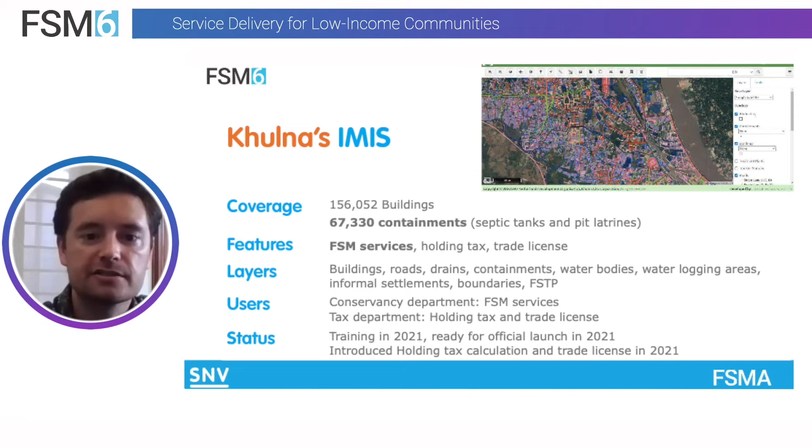In Khulna, we have also the census of 150,000 buildings, and the 67,000 containments that the city corporation will use for FSM services, holding tax, and they are also planning for trade license.

In Gazipur, which is also a very big city, we selected 2 of the high-density zones, and we collected census-based information of the 130,000 buildings with all the information about the containments, the connection to the water supply, and others. The city will use the IMIS for FSM services, sewerage, holding, and also water supply. And in other smaller cities, we collected information of 1 ward now, and it will also be used for FSM service and holding.

Of course, there are a few challenges associated with the implementation of the IMIS. The data the municipalities have are not comprehensive enough and not updated, and it is very difficult to get access to this data.

Holding ID is the key to the IMIS system, and there is no nomenclature in Bangladesh for holding ID. And we know that adapting changes is always a challenge in any organization. And finally, hosting data requires a significant fee to be borne by the municipalities, and we are negotiating with the central government to reduce or waive the fee.

The potentials of IMIS are endless. For example, cities having multiple authorities providing the services can share their data through the IMIS for better coordination. The online payment system can be used for paying the taxes and the service fees. And the IMIS can also be linked to national databases. For example, the health information system, if linked to the IMIS, can monitor COVID-19 cases in a particular municipality with their geographical distribution.

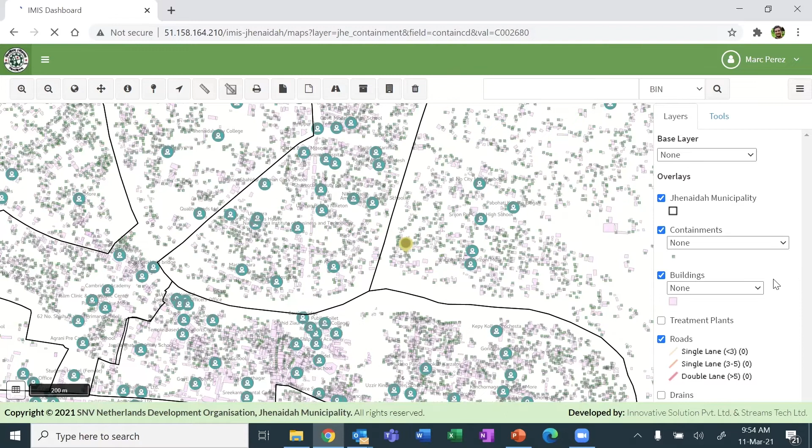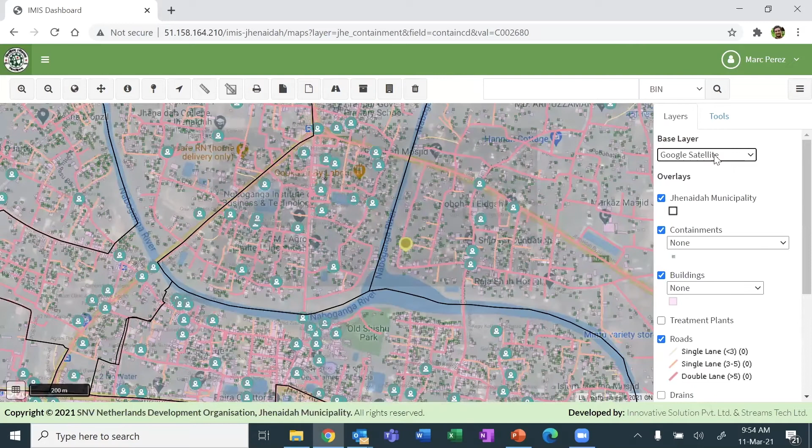We can see the latest applications in Jhenaidah. Here with the lists, we have all the applications, and we are going to select this application here. We have different actions. We can go directly to the map to see exactly where this containment, which was emptied last month, is located. We see some layers on the right side. We can enable or disable any of those layers. We can add in the background Google Street, OpenStreetMap, or Google satellite information. We can also enable water bodies or disable landmarks.

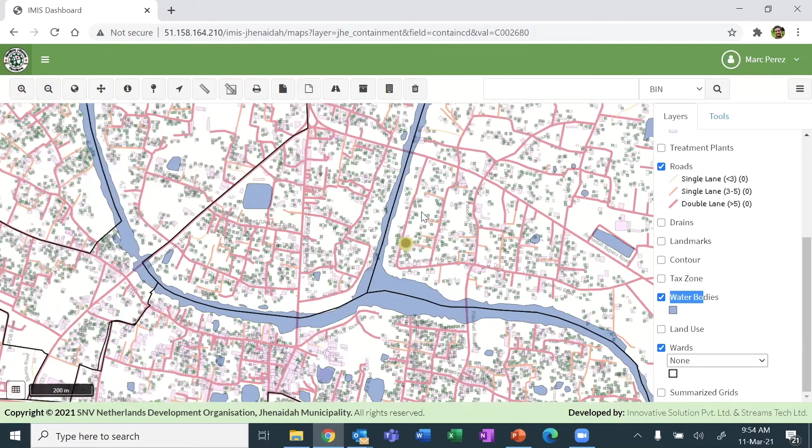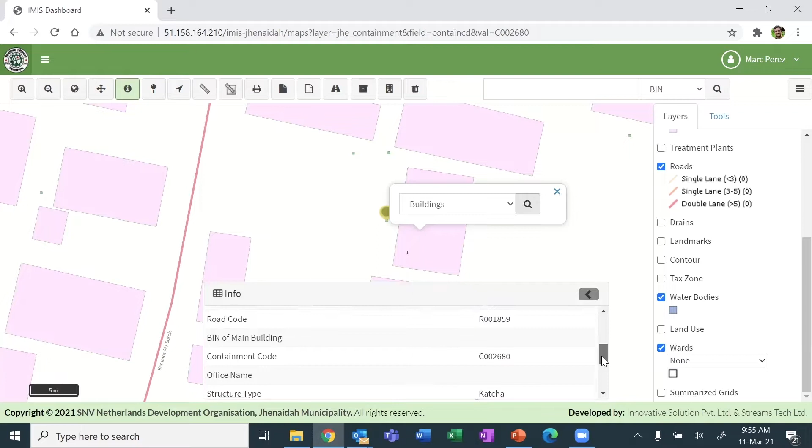Then we can zoom into the containment that we selected and see its information. This is a pit latrine in ward number 1. The size is 3 cubic meters, and it serves the people in this household. It's connected to that road. We also see when the next emptying date for that containment should be. We can also see information about its building, the tax code, the number of floors, the area, or other information about the structure type or its function.

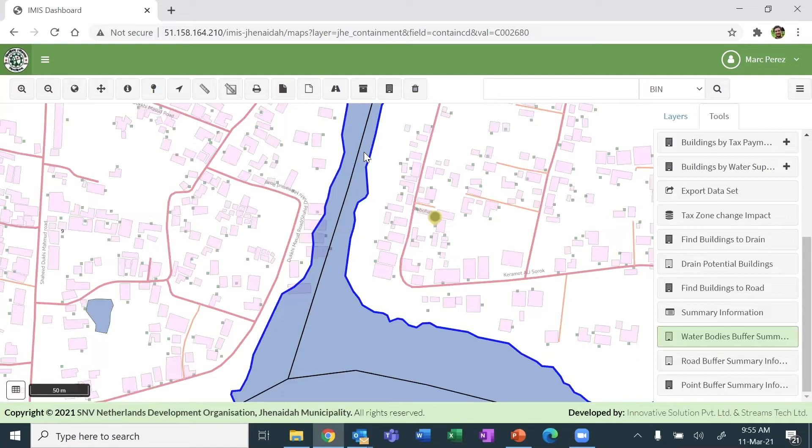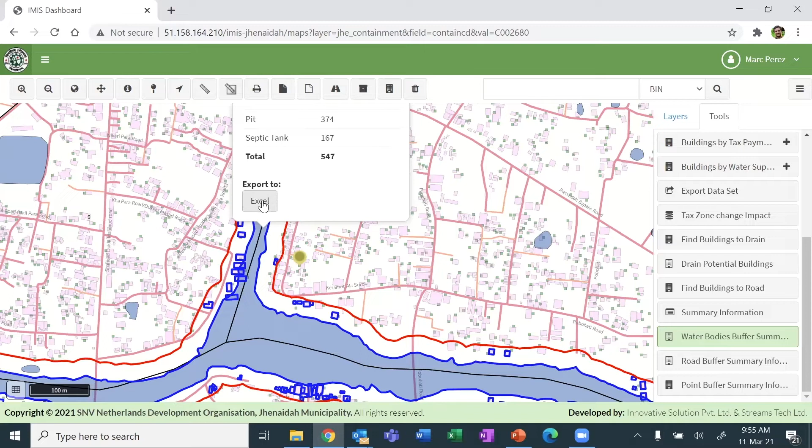Now let's see one of the functionalities for analysis. We can select the water bodies buffer summary. We will select one of the water bodies, say this Nabaganga River, and set a buffer area of 30 meters. It will show us information about all the buildings and containments within this buffer area. For example, there are around 500 buildings in this area with 374 pit latrines. This is very useful for rainy seasons to identify the buildings that can be affected by the rise of the water table and overflowing of latrines. And then, of course, export the data in Excel. So this is a very brief demonstration of the system.

This initiative is particularly aligned with the government initiative for Digital Bangladesh. And we hope that the central government will take up this issue, overcome these challenges and replicate it across the country.

Hi, my name is Freya Mills, and I'm presenting a recent research project on improving containment in dense, low-income areas, focusing on the common yet unsafe practice of septic tanks discharging to drains. This research was conducted in partnership between University of Technology Sydney, Emory University, and icddr,b, and was funded through WASH-UP and UK Aid. I'll present research from Bangladesh, where I investigated the health risks of sanitation in a dense urban slum in Dhaka.

This research found that septic tanks are being built discharging directly to open drains, which, despite functioning as designed, pose significant health risks as the effluent contains high concentrations of pathogens. While performing slightly better than direct discharge from toilets, the project questions the benefit of installing septic tanks where the necessary step of soil infiltration is unsuitable, and found that effluent must therefore be piped for further treatment to reduce health risks. Even back in 1992, the World Health Organization's Sanitation Manual stated that the problem with septic tank systems arises because inadequate consideration is given to the disposal of the tank effluent.

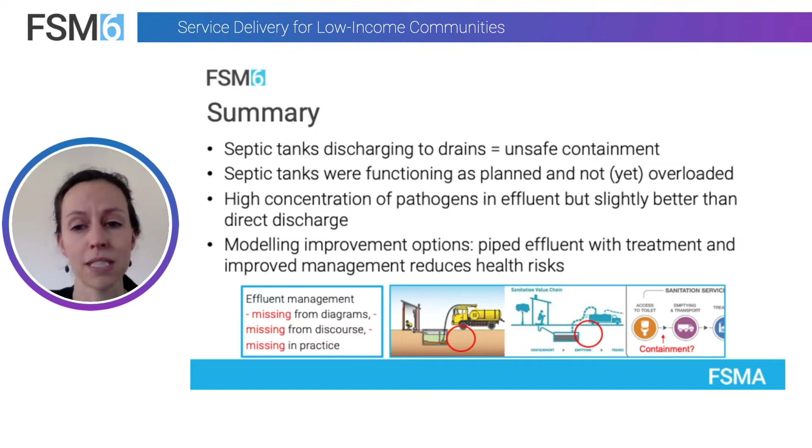This continues today, with effluent from on-site systems often missing from diagrams, missing from discourse, and missing in practice. This research was part of a larger project on the modelling of pathogen flows and health risks from sanitation systems.

As evident from the Global Water Pathogen Project, the data on pathogens in septic tanks is limited, unclear, and mostly from developed countries where the conditions of operating are very different. The study collected data from one low-income neighbourhood of Dhaka that uses a mix of toilets discharging to drains and septic tanks. We assessed 173 compounds serving almost 5,000 residents, which was almost full coverage of the site.

Samples were collected from 22 septic tank effluents and 30 open drains and were analysed for a range of pathogens. The team also measured the sludge depth of 7 septic tanks. The main limitation of this study was the small sample size, both in the single location in Dhaka and the small number of environmental and septic tank samples. This is limited due to cost of testing for multiple pathogens and the infield challenges of monitoring septic tanks.

As the septic tanks in this site were built by an NGO over the last 5 years, they were of known dimensions and allowed accurate analysis of how the systems were functioning. These toilets, along with most toilets in developing low-income areas of Dhaka, were shared by multiple families. The septic tanks in this site included 2 toilet pans discharging to 1 septic tank that were flushed with pipe water that came into the compound.

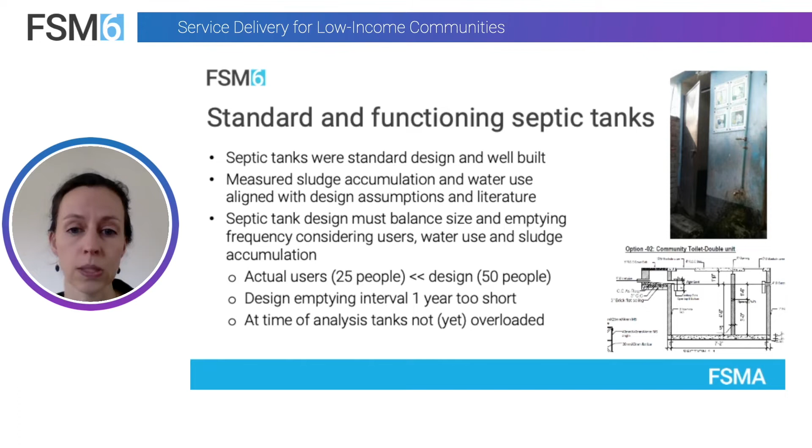Considering the sludge accumulation rate calculated from sludge depth measurements and water use, the tanks were assessed on whether they were overloading or still operating within the 2/3 full design criteria. At the time of the survey, most of these tanks were not yet overloaded, and therefore the following results can be considered applicable to septic tanks operating as intended.

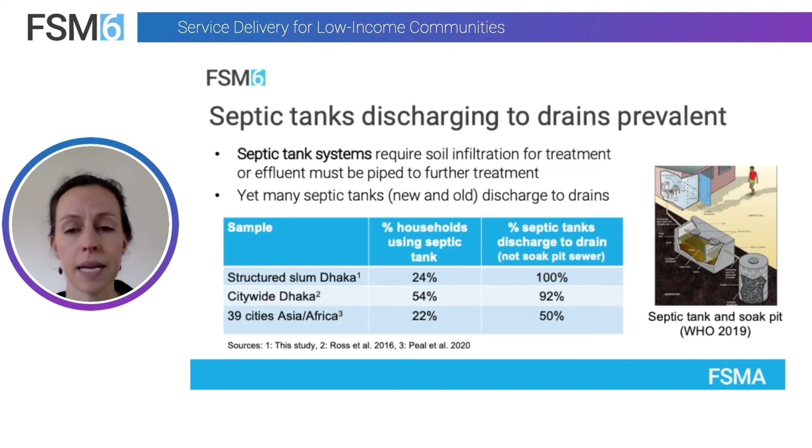The septic tank systems consist of the tank and the infiltration system or soak pit. Both of these parts are integral for the sanitation solution, as the septic tank must retain solids to prevent blocking the soak pit, and the infiltration through soil provides the majority of treatment, particularly for pathogens. Despite this, all of the tanks in the study site discharged to an open drain. And now that data on management of effluent is increasingly being included in monitoring for SFD and JMP analysis, it is evident that septic tanks discharging to drains is a global issue.

The analysis of septic tank performance relied on an estimate of inflow concentration, as physically assessing the influent and taking a representative sample is very difficult. The tanks received only black water, with grey water directly discharged to the ground or drain. Based on 22 effluent samples, the log reduction between the estimated inflow and the measured effluent was between 0.8 log per 100 ml for Giardia and 2.4 log for cholera and Shigella.

Septic tanks also offered some reduction to the pathogen concentration in drains. Statistical analysis was conducted to assess the association between the observed pathogen concentration in drains and the population using septic tanks in each of the 4 streets of the study site. This found that an increase in septic tank use was associated with improved drain quality, with significant results for Giardia and Shigella.

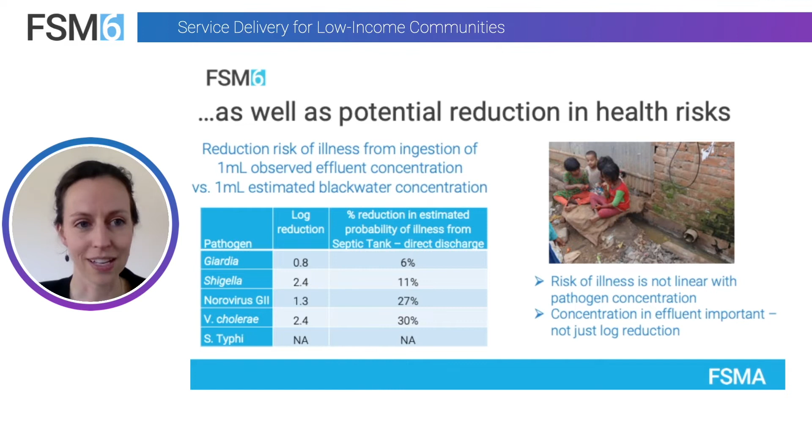When estimating the probability of illness for QMRA modelling, it was evident that the relationship between illness and pathogen concentrations is not linear. To understand the relative extent to which the reduction in concentration was associated with health risk, we compared the probability of illness of an assumed 1 millilitre ingestion of the estimated concentration of the raw black water, say from toilet direct discharge, with 1 millilitre ingested from the effluent from septic tanks.

Comparing results for Shigella and norovirus and cholera shows that log reduction doesn't translate directly to health risk reduction and highlights the importance of considering the effluent concentration in designing sanitation improvement systems, rather than just the log reduction as is sometimes used in assessment tools.

Understanding how sludge depth influences effluent concentrations is an important question given the number of septic tanks discharging to drains and the sector's focus on emptying and its benefits for public health. We assess this through measuring the sludge depth in comparison with effluent quality and comparing the effluent quality from an emptied tank with other unemptied tanks of similar age and use. However, due to the small sample size, the results are inconclusive and further research is needed to answer this important question.

As mentioned previously, this research is connected with a large project of modelling pathogen flows and improvement options. The analysis found that high risk remained if all residents use septic tanks. To reduce risks and have a positive impact on public health, it was necessary to pipe effluent with further treatment, either as professionally managed or decentralised treatment or as a centralised treatment system. This project also investigated ABRs, which are similar to septic tanks in their limited removal of pathogens and need for further effluent treatment, despite many ABRs also being installed directly discharging to drains.

For areas where soil infiltration is not suitable, such as areas of shallow groundwater, high density and low permeability soils, such as in Dhaka, there needs to be management of effluent through alternative means. This raises the question whether septic tanks or on-site sanitation solutions are necessarily the best option for these areas.

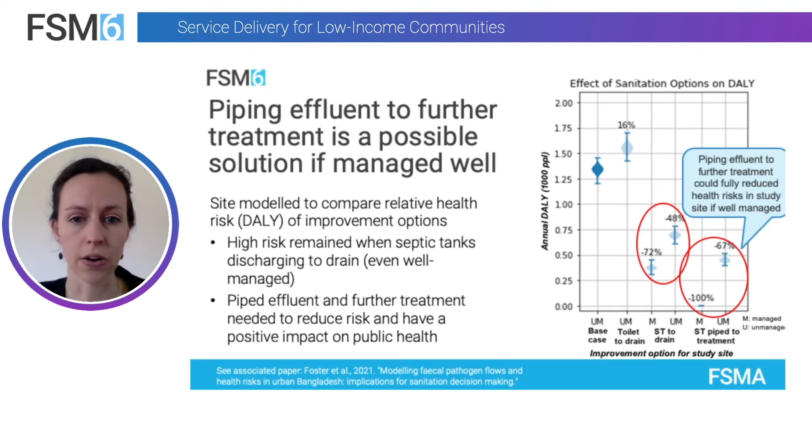This research has raised some questions for the sector that still need to be addressed. Firstly, to what extent does desludging septic tanks improve pathogen removal and effluent quality, and therefore help reduce the health risk or not? What alternative options to retrofit and improve existing systems exist, such as effluent filters, above surface filtration, or extra chambers on the septic tank? Or do we need other solutions and to move away from household level treatment, such as professionally managed community or neighbourhood scale systems with adequate treatment for pathogens?

Thirdly, why are these systems still being built when they shouldn't? What else do we need to address this issue? Knowledge, building regulations, or something else? And also we need to highlight that wet pit latrines also discharge and have overflows to the living environment, particularly in poor ground conditions. Has this issue been looked at, and is it a similar concern to that of the septic tank effluent?

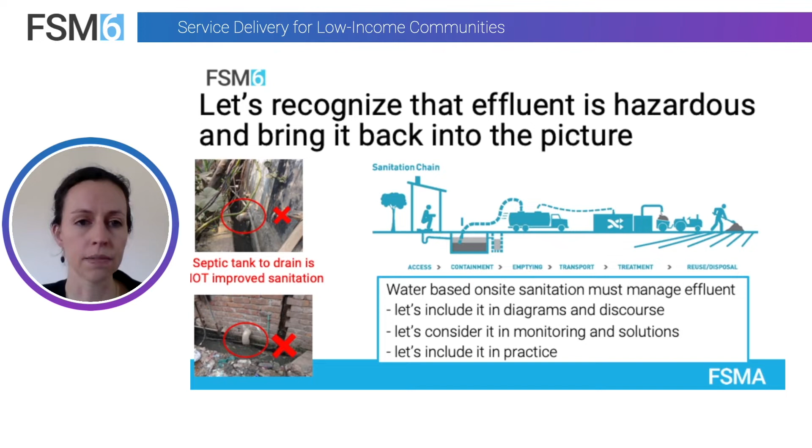To conclude, this research has highlighted the hazard that septic tank effluent poses to public health, particularly in these low-income areas where there is high exposure to open drains, and that the waste is then further spread through heavy rainfall and flooding. Septic tank systems require management of the effluent, and soil infiltration is an important part of the treatment process. Septic tanks alone provide some pathogen reduction, but it's not enough. It's important to start considering effluent management in design, in monitoring, in discourse, and importantly in practice.

This research will hopefully be published in the coming few months and is also connected to 2 existing published papers associated with this research project.

My name is Nicola Greene, and I'm a fecal sludge management consultant based in Nairobi, Kenya. So today I'm presenting work on behalf of Triangle Environmental and North Carolina State University, where we quantified the largest invisible market in our FSM world, manual pit latrine emptying.

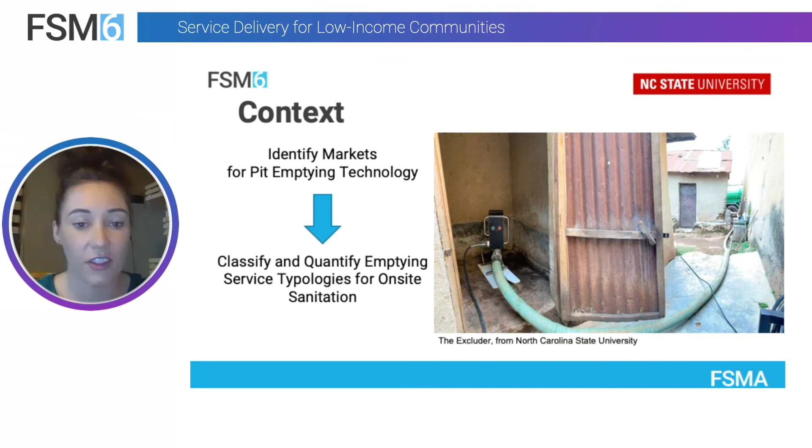So a little background on the original purpose of this work. NCSU has been working for the past several years on novel pit emptying technology called the Excluder, which you can see in this image. So this technology targets pits that cannot be emptied by traditional mechanical means by excluding trash. So our goal in undertaking this work was therefore to identify markets for the pit emptying technology. In doing so, we needed to both classify and quantify service typologies for on-site sanitation to see where such a piece of equipment would be needed and in what quantities.

So when I talk about classifying emptying of on-site sanitation facilities, we consider three main types of emptying. We have mechanized emptying that takes place at a containment facility that can be emptied by a pump, that might be a trash pump or an exhauster truck. We also have non-mechanized emptying, so that happens at a containment facility where it would not be possible to use a pump, and that's usually due to trash, limits of access, or thick contents. So those end up being manually emptied quite often.

And we also have unemptiable pits that might collapse if someone attempts to empty them. So if we zoom out to the bigger picture of why this is important, oftentimes to have a system that can be emptied by non-mechanized means or unemptiable means, we can break the safely managed sanitation chain. So waste removed via non-mechanized emptying or manual emptying often doesn't reach a treatment facility. And sometimes an unemptiable pit, once it's filled, is not replaced.

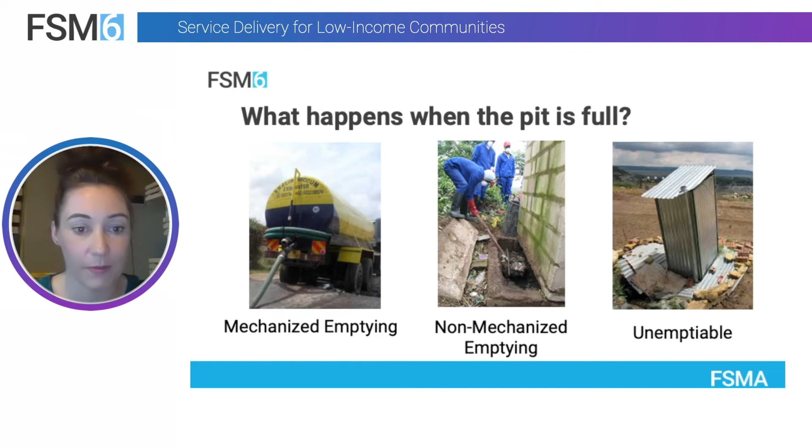So that's the critical consideration in this work beyond the technology. What's the pathway to safely managed sanitation after these types of emptying? So we proceeded to consider the balance between these three markets globally. What's the split of these markets across the world? Mechanized, non-mechanized, and unemptiable. So to do this, we went to JMP data and we tried to map technology types to our service types. So on-site sanitation types are septic tanks, improved pit latrines, and unimproved pit latrines. So of course, for this, we had to make some generalizations and assumptions.

For septic tanks, we considered that 100% of these should be emptiable via mechanized emptying, whether it be via a simple trash pump or an exhauster truck. These tanks should be wet, they have less trash due to the user interface, and they should be emptied via mechanized means. We applied a similar blanket approach to unimproved pit latrines, which you can see across the bottom of the slide. So we considered 100% of unimproved pit latrines to be unemptiable. We assumed that if a pit is low quality, it may collapse when it's being emptied, or it may not be worthy of emptying due to the low investment.

So improved pit latrines are a bit more diverse. So to consider which ones of those might be emptied via mechanized means, we looked first at which ones were wet and dry. So for this, we used access to water as a proxy. We considered that all dry pit latrines were emptied via non-mechanized means. For wet pits, things got a bit more tricky. So we used a survey of exhauster truck operators and manual pit latrine emptiers to apply proportions of these pits that might have trash or accessibility issues that prevented mechanized emptying. And we made the splits according to the percentages that you can see on the slide.

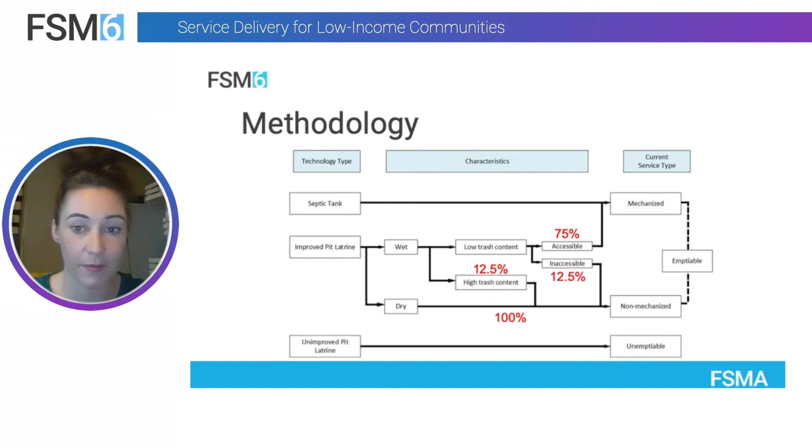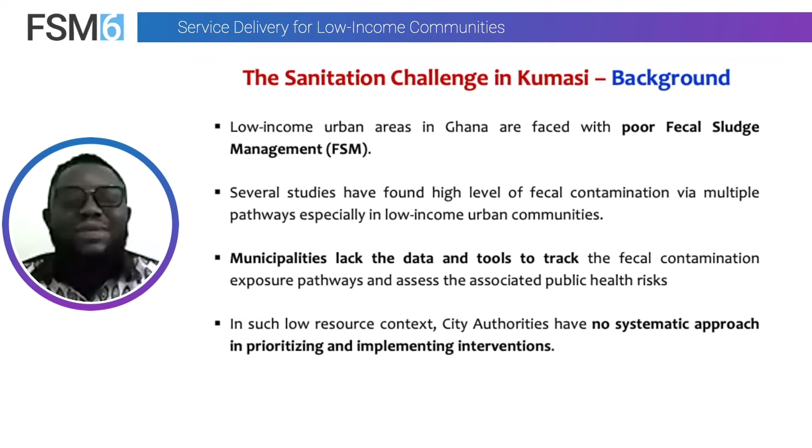The sanitation challenge in Kumasi is such that low-income urban areas, and largely in Ghana, face poor fecal sludge management. And several studies have found high levels of fecal contamination via multiple routes, especially in low-income urban communities. However, most municipalities in Ghana and most parts of the global south lack data and tools to track the fecal contamination pathways and assess the associated public health risks that come with poor FSM. In such low resource contexts, city authorities have no systematic approach in prioritizing and implementing interventions.

Kumasi is the second largest city in Ghana, with a population of 2.5 million, and about 40% of its population relies on public toilets. Still in Ghana, 25% of households have access to basic sanitation, which means that a lot of households have limited access to safely managed toilet facilities. Given the complex exposure routes with different levels of contamination and types of exposure in the urban environment, it has been difficult to determine the set of interventions that will have the biggest impact on the reduction in exposure.

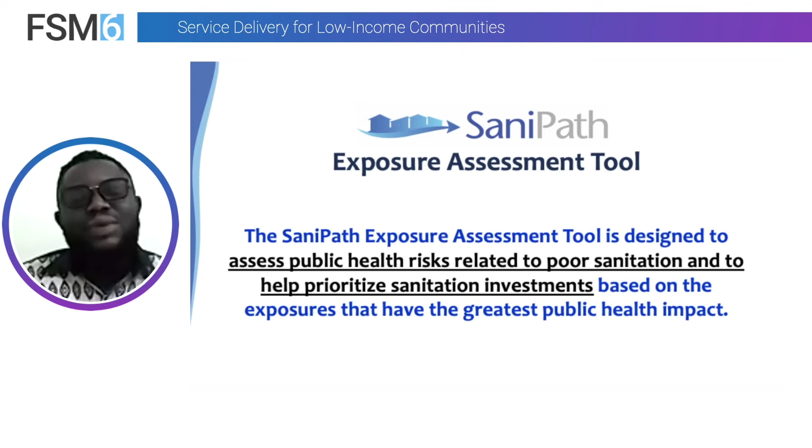The strategy for implementation of this project was first creating awareness and stakeholder engagement, generating evidence to support planning and design of interventions, then results to action. The last part is policy influence, where we are using the results and outcomes of this project to influence the way we think about environmental risks, the way we think about fecal sludge management in cities and low resource contexts, and to initiate evidence-based planning in sanitation. So this is to contribute to how we plan for sanitation in low resource contexts.

In creating awareness and stakeholder engagement, we first engaged the key stakeholders in the Metropolitan Assembly, where we introduced them to the tool and what the tool is able to do, the kind of data the tool can generate, and how the tool can support planning.

Through that, we signed an MOU between the Kumasi Metropolitan Assembly and Trend. And through the MOU, the Kumasi Metropolitan Assembly made available environmental health staff to support the implementation of the SaniPath tool.

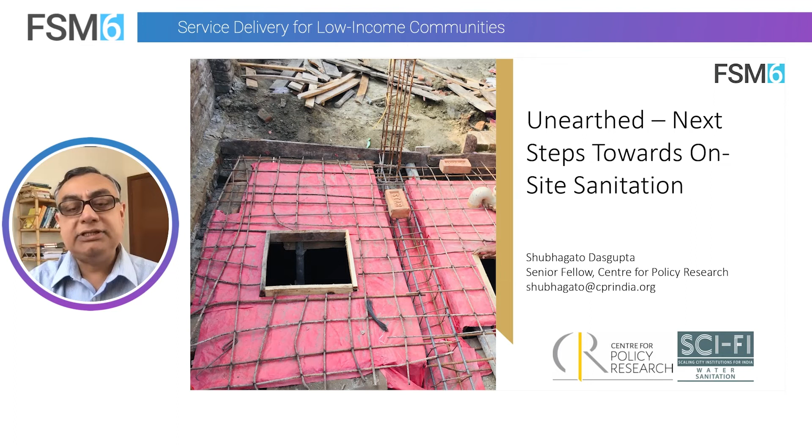So as I take you through the presentation, I'll take you through a little bit of the context of FSM and the importance of on-site systems within FSM. I'll take you through the study itself, what the design parameters of the survey were, and what lessons we learned. And then finally, we'll do a little bit of a discussion around how we are using the information as we take the study forward into practice.

So to start off with, as we know, 60% of India's urban households depend on non-network sanitation in general. This has been a reality in India since 2011, when the census brought out that many of our toilets were not connected with sewers, and most of them were connected to on-site sanitation systems.

In spite of the large, massive program called the Swachh Bharat mission that happened in the last 5 years in India, we see that it only increases the reliance on FSM and on-site sanitation systems. And as per our early projections, it looks like almost 960 million population in India is going to have to be dependent on FSM and on-site systems as we move forward.

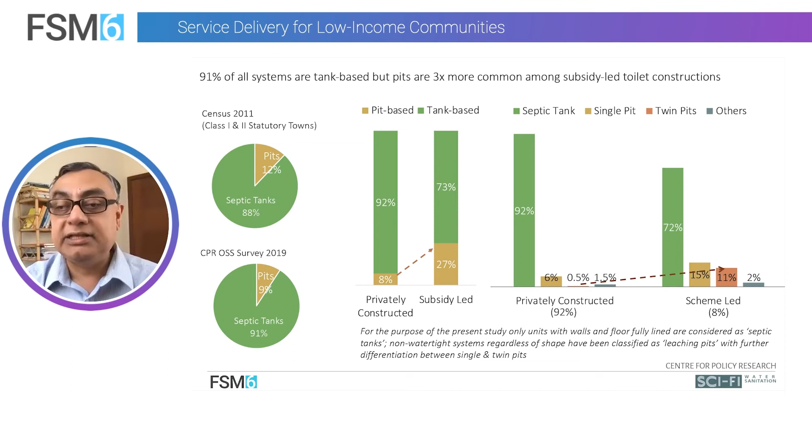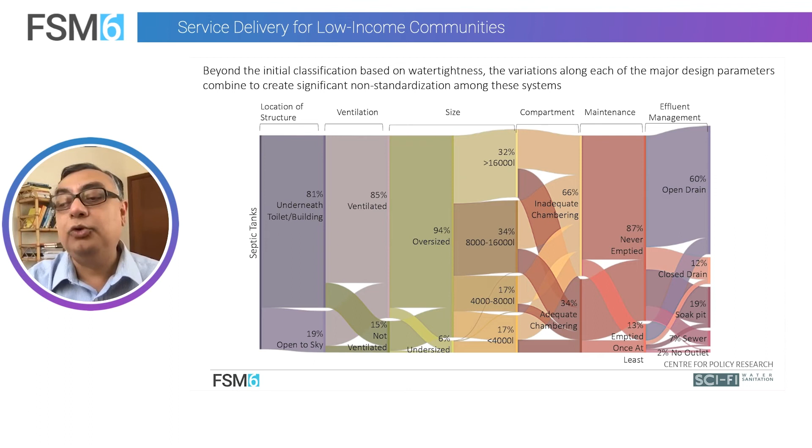We did find that privately constructed on-site systems were larger in size than subsidy-led ones in general. We found household size and the MPCE, that is the expenditure that households have, to be very strong criteria, but much less so the number of users, the flushing type, the location within the house plot, and its distance from the water source, as determinants of the size of the on-site systems.

We followed this up by looking at the deviance that these on-site systems had from typical guidance in the codes. So there is an Indian Standard Code 2470 against which we evaluated what we found from our survey. And we found that only around 10% of them reach a score of 8 out of 10, while most of them fail. If it was a yes-no situation, only around 2% of the septic tanks would make the yes criteria, but there was a grading within it. In terms of leach pits, however, there was a higher compliance with the standards, but not so in terms of septic tanks.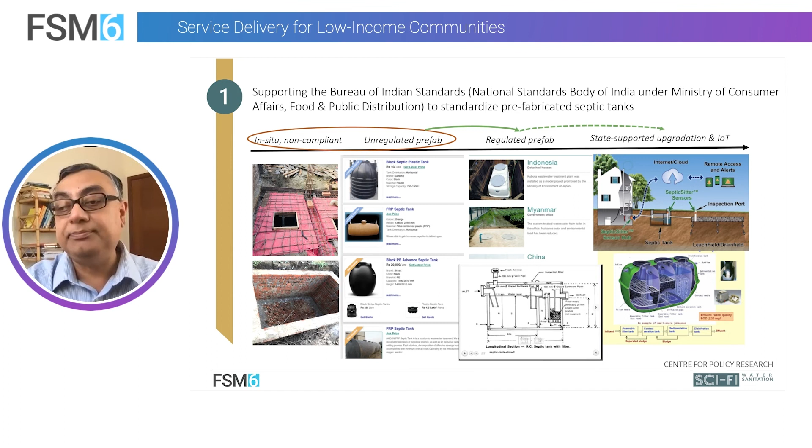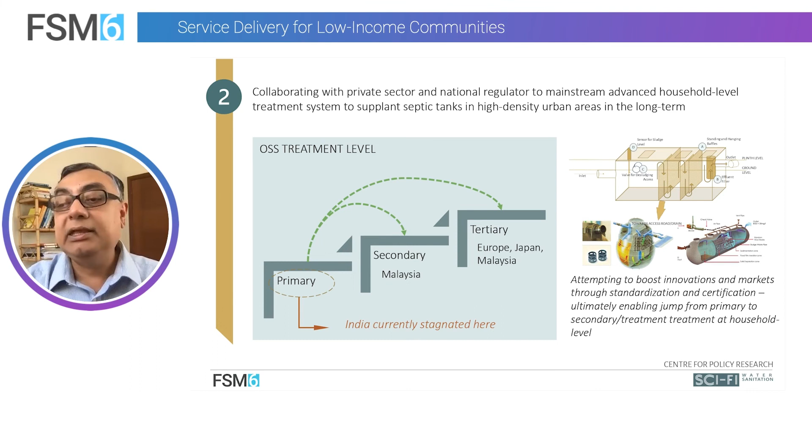Alongside this, in a step-by-step process, as India grows, it is still a very urbanizing country. As newer septic tanks come in, we are hoping that these new standards, which are informed both by ground realities and by technical requirements, can take India forward into a better space.

Alongside this, we are also developing a national digital monitoring platform in association with an open source platform run by eGov Foundation, another of our partners, wherein we are trying to monitor the collection of information around on-site systems and the desludging activities that happen, so that over a period of time, we can achieve better on-site systems across the country.

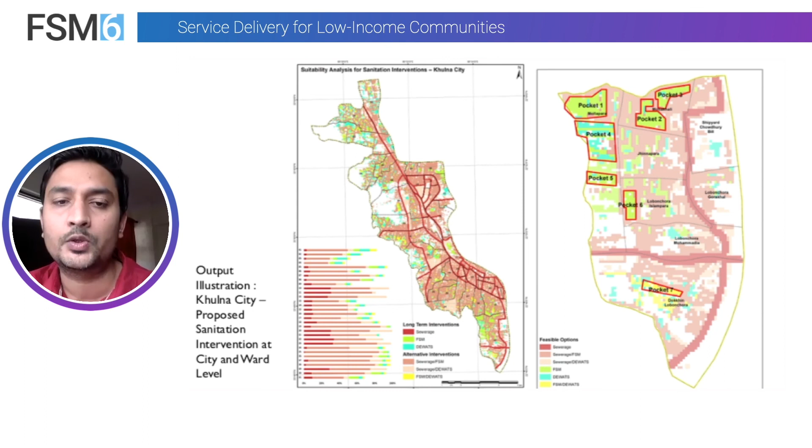But here with our DST, we found there is a conflict in these areas, and all these conflicts have been discussed, analyzed and brainstormed in detail. And the final solutions of these settlements, not just for the conflict areas, but there were also areas which were not covered by the sewerage system. So those areas have also been looked into.

And then the final interventions for Nagada are that each and every settlement is connected with safe sanitation access, whether it is in terms of sewerage, grey water solutions, FSM or DEWATS, but the entire city is connected with that scope, and the DST has been able to help us get that kind of a picture here.

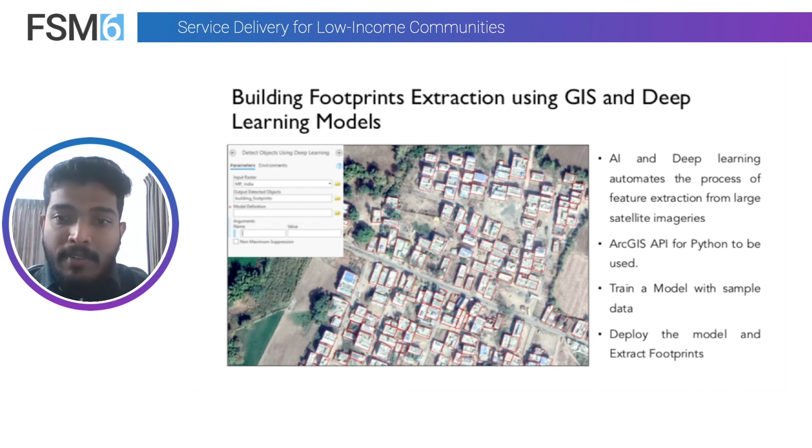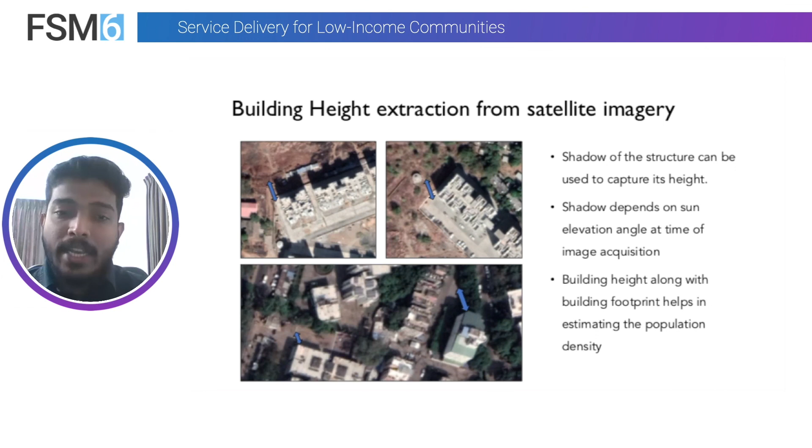I'll just quickly explain some of the deep learning techniques we have used here. For example, building footprint extraction was one of the key challenges we had. In most Indian cities, or cities in developing countries like Bangladesh, data was a major gap. So through deep learning techniques, we have identified building footprints. We can even extract the building height from the shadow in the satellite imagery, using the sun elevation angle, etc. All these are scientifically proven methodologies which we have adopted in the tool.

Another example is identification of settlement typology from aerial imagery. For example, in Indian cities, we can clearly differentiate between planned settlements, unplanned areas, and even slum settlements.

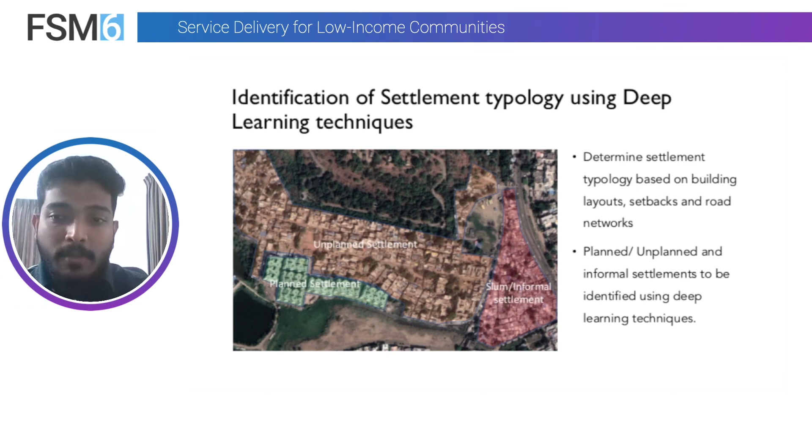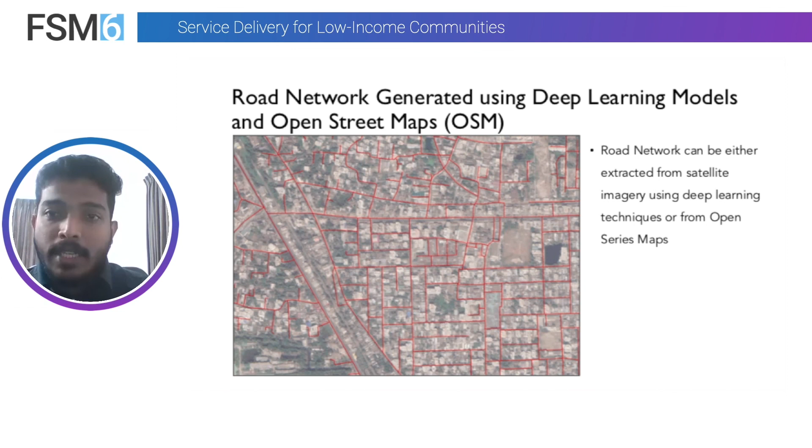So these can be trained using GIS and deep learning techniques, and the system itself can extract and give you information about the different typologies which are available. Another example is the extraction of road networks using deep learning techniques, and even OpenStreetMap we have used in some of the cities to generate road networks. Another is the extraction of elevation data from open source DEM.

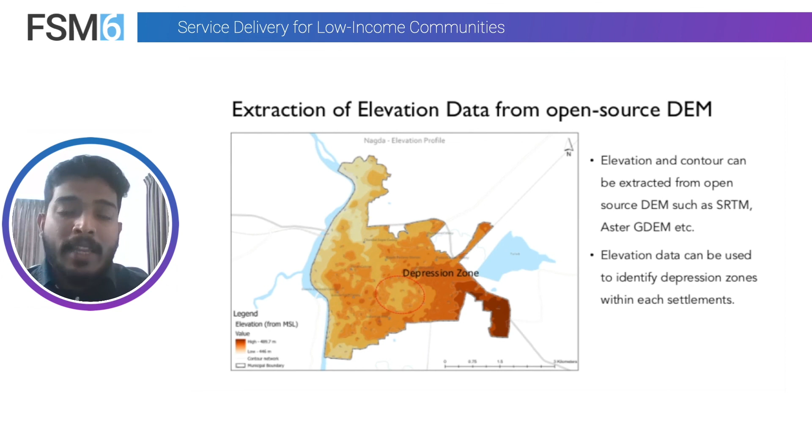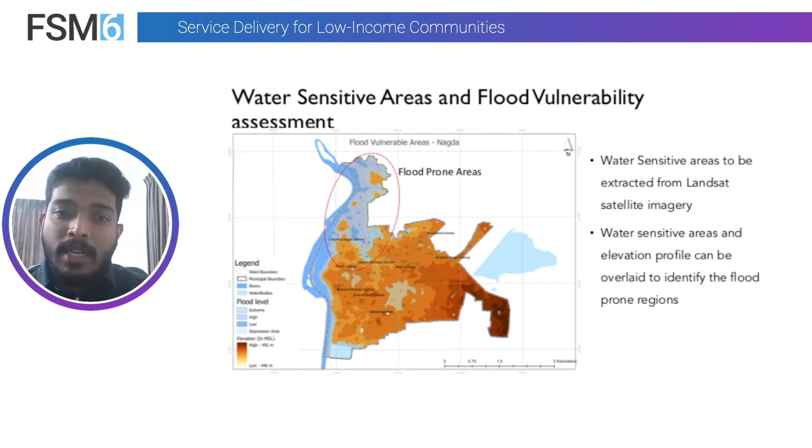So what we are trying to do is simplify the complete model, so even for a city without much data available, we can run the model and still get an output. Another example is flood vulnerability in water sensitive areas. Through recent Landsat 8 satellite imagery, we can have a complete picture of the water sensitivity, and through elevation data integrated with water sensitivity, we can assess the flood vulnerability level. So all these add on to our final intervention suitabilities.

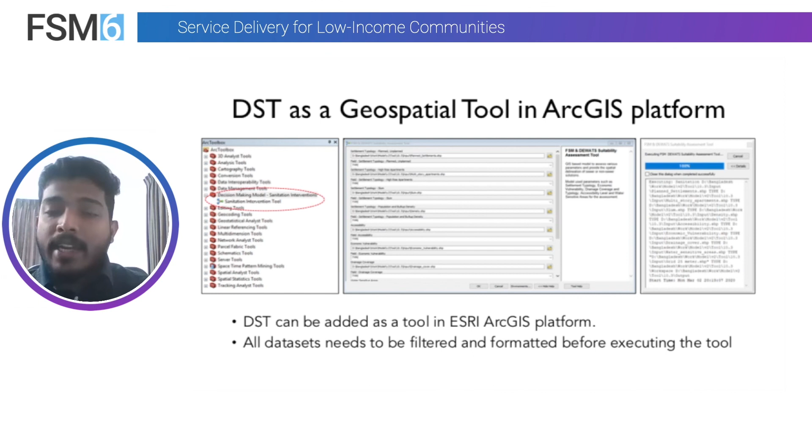As I said before, we have generated the DST and made it a tool in the ArcGIS platform. So anyone, even without a coding background, can run this model in ArcGIS and get the result. The main advantage of having a tool in ArcGIS is that after a few years, once the data is revised, since the city changes every year, we can redo the model every year and get a revised, new output. Over to you, Suraj.

Yeah, thanks, Mithun. As my colleague Mithun rightly mentioned, data is a key challenge in developing and other contexts here. But with AI technology and the deep learning tool we have been able to overcome that. Even if there is no data, this tool works very fine. Even in some of the towns that MP just talked about and showed you the interventions, especially Nagda, there was very minimal data available at the city authority.

So this is one of the key USPs that we have here: this works as a rapid assessment tool, and it can give you feasibilities for the cityscape in a very short period of time. The other key advantage is that it gives the city authorities a sense of implementation phasing, of how to plan the sanitation interventions. It also gives a good contextual input for designing the sanitation regulations for the cities.

Coming to the ground results, very quickly: 8 towns in Madhya Pradesh have adopted this tool and are now going ahead with the implementations. 2 towns in Rajasthan have done the implementation already. Khulna city is now planning the DEWATS interventions and also the phase 1 sewerage planning. They have also utilized this tool and are doing it accordingly.